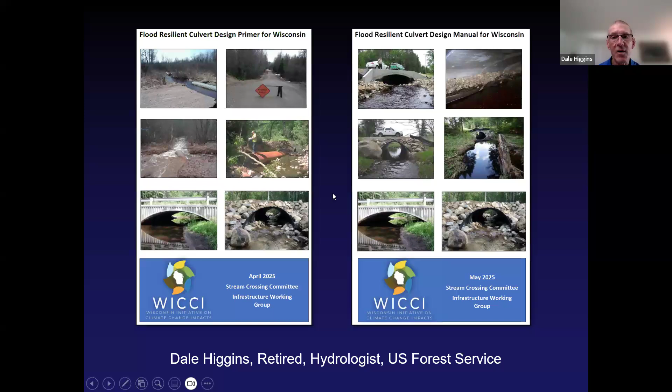In the webinar today, we hope to give you a quick overview of the differences between the primer and the manual, briefly go over traditional culvert design versus flood resilient culvert design and its benefits, and spend the bulk of the time on these six design steps. One thing I'd like to point out is that this comparison of traditional and flood resilient culvert design is only contained in the primer.

Pardon me? I muted them. Keep going. Okay, alright.

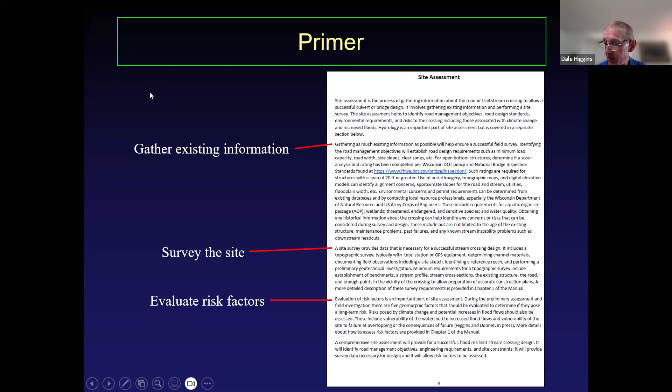Thanks. So as you might expect, the primer is a very concise document, and it essentially tells you what is required and why it might be required, but it doesn't go into the details of how to collect the data or perform the analyses. The manual, on the other hand, has sections several pages long, and it goes into much more detail, not only on what's required, but how to collect the appropriate data or perform the required analyses.

Next, I'd like to talk a little bit about traditional culvert design, which is based on a method we refer to as hydrology and hydraulics, or H&H. It's simply determining the peak discharge and performing a hydraulic analysis, and selecting a culvert size that'll pass the design discharge at an allowable headwater to depth ratio.

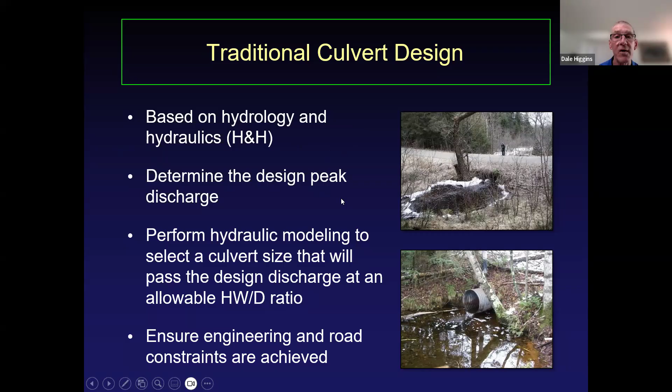So what's headwater to depth ratio? Hopefully this diagram will help set the stage.

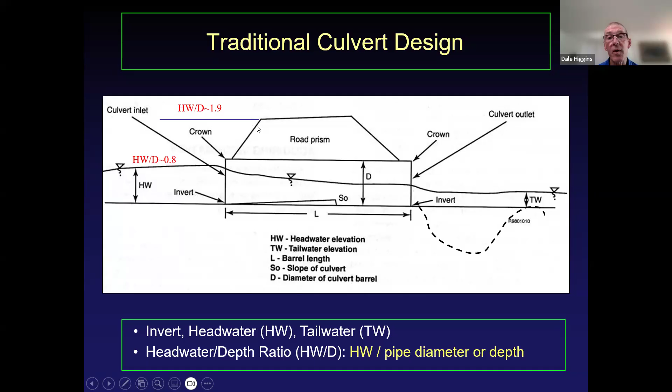Here's the culvert, road prism above it, the water surface, water flowing from left to right, comes down through here. So the headwater is the depth of water acting on the culvert at the inlet, and the depth is really just the height of the culvert or structure at the inlet. In this case, the headwater depth ratio would be about 0.8. If the water were up where it would overtop the road, it'd be a headwater depth ratio of about 1.9.

The first step in the traditional H&H is to estimate the design discharge, you need to select a flood frequency. So I need to cover a couple definitions right away.

The annual exceedance probability, or AEP, is the chance a flood will be exceeded in any given year. It's usually expressed as a percentage, but it can be as a fraction. The recurrence interval, or RI, is the average number of years between an event being exceeded, calculated simply by taking the inverse of the AEP fraction.

So the traditional H&H tends to both minimize culvert size and installation costs. And what that can do is adversely affect both the infrastructure and the ecology, because it doesn't take into account the geomorphic characteristics or processes of the stream.

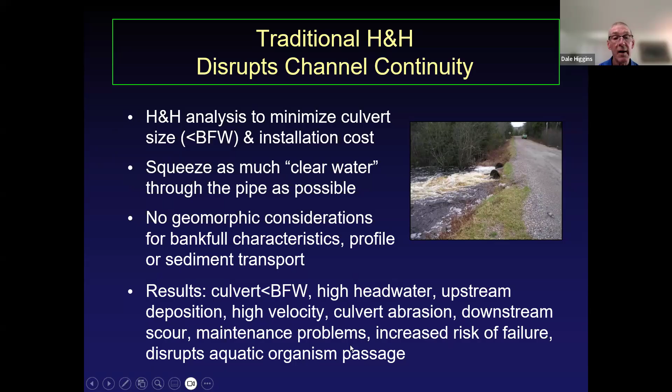So then what happens is this results in culverts less than bank full width, high headwater where you get deposition of sediments upstream, high velocity abrasion in the culvert, downstream scour, maintenance problems, increased disruption of aquatic organisms, and these all lead to increased risk of failure.

So in the primer, we have 7 key requirements of flood resilient culvert design listed. Throughout the webinar, when you see these, we'll have them highlighted in the same color to help them stand out. I only want to mention a few right now.

The first one is that structure width be greater than or equal to bank full width. The other one is maintaining a minimum hydraulic capacity with the headwater depth ratio less than 0.8 at the 1% annual exceedance probability.

When it comes to flood resilient culvert design, we've got methods broken out by moderate to high gradient streams and very low gradient streams. The general concept of this flood resilient culvert design is to design a stream through the crossing and wrap a structure around it. So many of you are probably aware of this classic stream simulation design, and the stream through the crossing is designed based on a nearby reference reach.

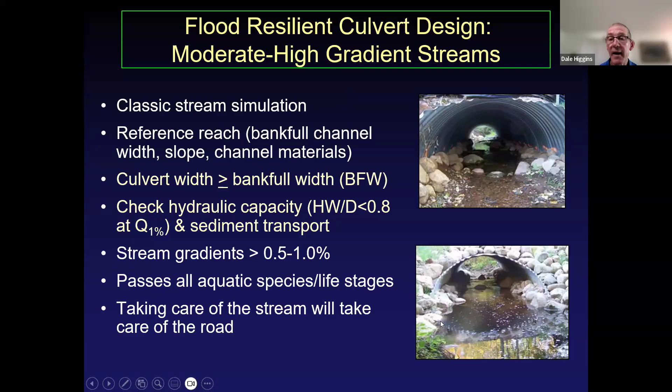In our case, we're saying it generally applies to stream gradients greater than about 0.5%. And one key is that you'll always construct a stream bed and banks through the structure like you see here.

For very low gradient streams, we're talking about streams that only transport sand or finer materials, with slopes less than about 0.5%. We have some modifications for Wisconsin: you set a bank full width culvert at the appropriate elevation, and the sides of the culvert act as the banks.

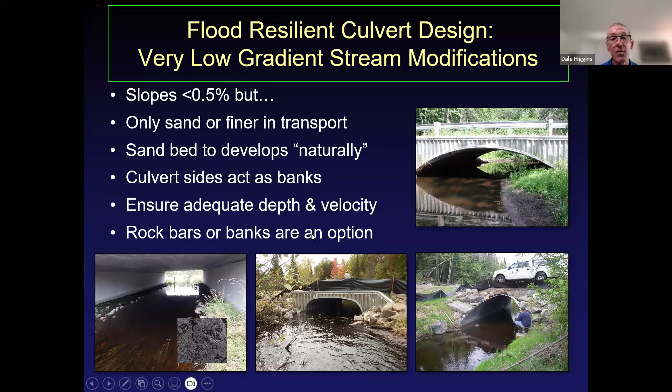A natural sand bed will develop within the culverts. You don't necessarily have to build a bed through, but you can construct rock bars or banks if the depth would be too shallow or the velocity would be too high.

I'd also like to point out that the road would not overtop until the flow reaches almost 5 times the 1% AEP flood. So greater flood capacity and freeboard.

For consideration of passing wood, a study in Northwest California several years ago found that most wood in transport was less than bank full width, and in that case, 99% was. But also that wood longer than bank full width tended to move parallel to flow.

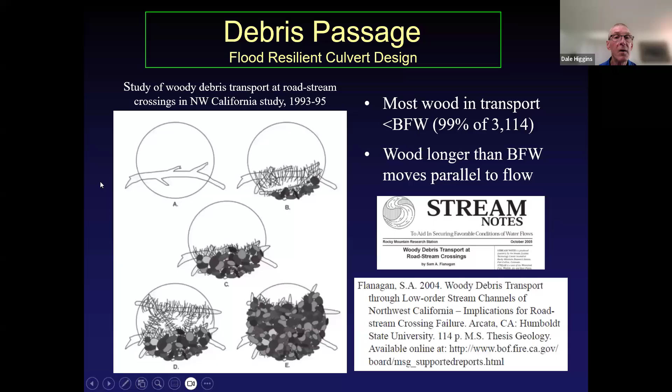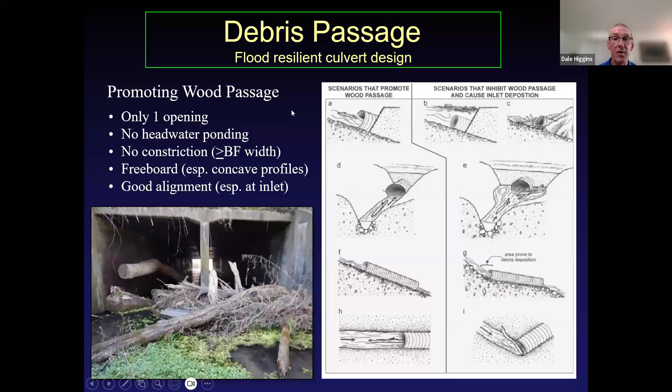Another consideration is abrasion. Exposed inverts are subject to abrasion, which dramatically reduces the lifespan of the culvert, and failures typically occur during high flows. With flood resilient culvert design, you have a bed in the structure which protects the invert from abrasion and dramatically increases the lifespan of the culvert.

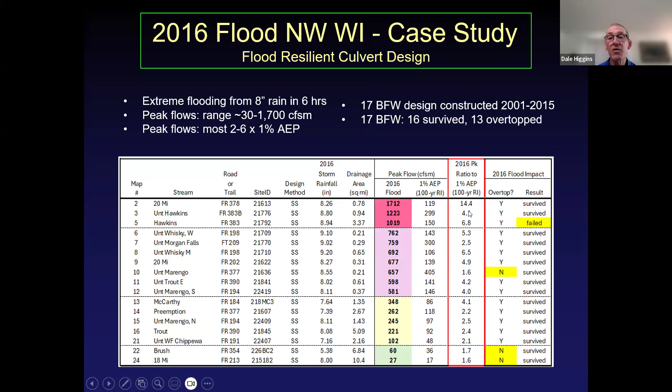The last thing I want to do in this part of the presentation is provide a brief review of a case study of the 2016 flood in Northwest Wisconsin. In that case, 8 inches of rain fell in 6 hours, causing catastrophic flooding and causing most stream crossings in the area to fail. During flood recovery efforts, the Forest Service was able to make a large number of peak flood flow estimates to characterize the extreme nature of the flood. It also happens that they had installed 17 bank full width culverts in the flood area from 2001 to 2015, prior to the flood. 16 of those 17 structures survived, even though 13 overtopped, and they survived flows anywhere from 2 to almost 7 times the 1% AEP flood.

A couple more examples here. Not only were these bank full width culverts, but the roads had broad overflow areas, and substantial parts of the flood did go over the road. They lost some minor to more significant amounts of gravel off the road surface, but the road structure survived, requiring only minor or moderate maintenance. These crossings survived flows that were 2.5 to over 4 times the 1% flood.

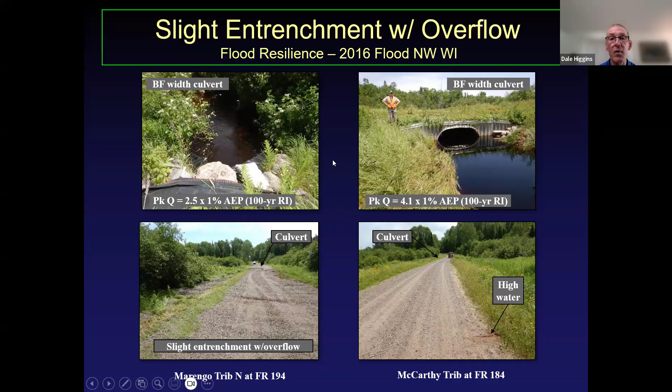We're hoping this case study will be published within the next several days. It promotes using flood resilient culvert design as a baseline at all crossings, then considering the vulnerability of the watershed to increased flood flows in the future, also considering the vulnerability of the site to failure at overtopping, and adding additional design elements as vulnerability increases. With that, I will stop. Thanks.

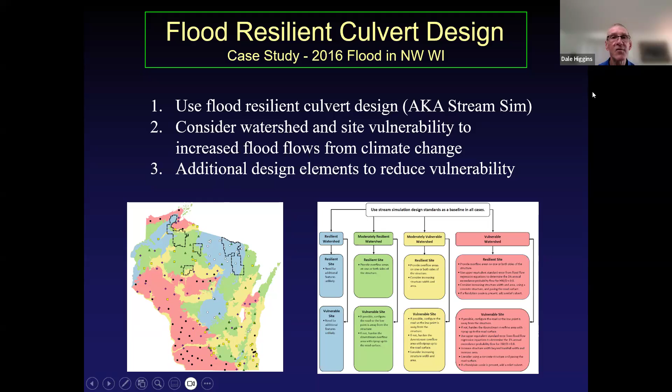Okay, so what we're going to do next is walk through each of the 6 chapters and the 2 appendices of the Flood Resilient Culvert Design Manual.

Let me start with chapter 1, which is all about site assessment. Site assessment is really about what essential field data needs to be collected to inform a flood resilient culvert design. We're going to start with one of the most important things to identify in the field, and that is characterizing the bank full channel.

As you'll learn today, bank full width is really the most important sizing criteria when it comes to determining structure span. So what is bank full width? Bank full width is the water surface width measured at the bank full stage. What's bank full stage? It's the elevation of the water surface at the bank full discharge, also known as the incipient point of flooding - the point where water is about to spill out of its channel and into its floodplain. The bank full discharge is a frequently occurring peak flow that occurs roughly every 1 to 2 years, depending on where you're at.

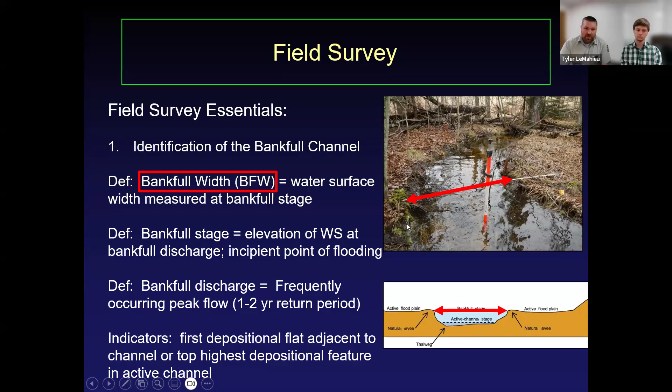Most of our channels, unless they've been severely impacted, actively feature indicators consistent with this bank full stage and bank full width. What you want to look for in the field is the first depositional flat adjacent to the channel, and its elevation should also correspond, if present, to the top of the highest depositional features in the active channel - things like the tops of point bars.

Moving on to the topographic survey side of field assessment, we need a longitudinal profile survey. This is a string of stream thalweg shots to the deepest point of the channel and corresponding water surface shots, taken at every major break in slope of both the water and the thalweg.

These need to extend ideally 20 to 30 channel widths upstream and downstream. So if we have a 10-foot bankful width channel, we need to go 200 to 300 feet upstream and 200 to 300 feet downstream.

Of course, we need cross sections. At least 4 are needed for hydraulic modeling, 2 upstream and 2 downstream. We need these cross sections to extend through the entire valley, ideally the entire floodplain, and to run perpendicular to flow, both in the floodplain and in the channel, even if that requires turning them, as you see with that non-linear cross section, which is a common practice.

Also, if there's a deep plunge pool below the culvert with a tailwater control below that pool, we need a cross section right through the high point of that tailwater control.

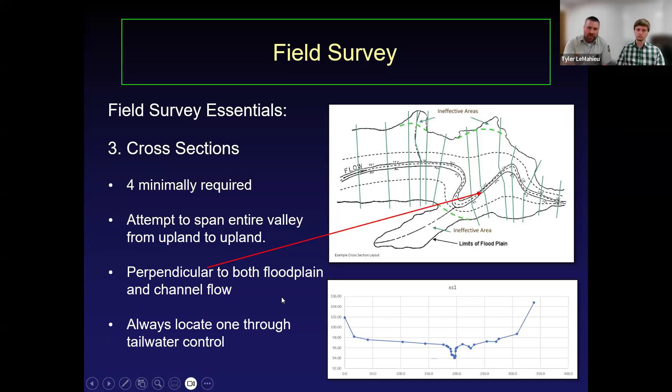Of course, we need to make sure our survey includes all the necessary topographic shots to characterize the road through the entire floodplain and encompassing any extensive road work. We need key shots of structures like low chords of bridges and inverts, bridge decks.

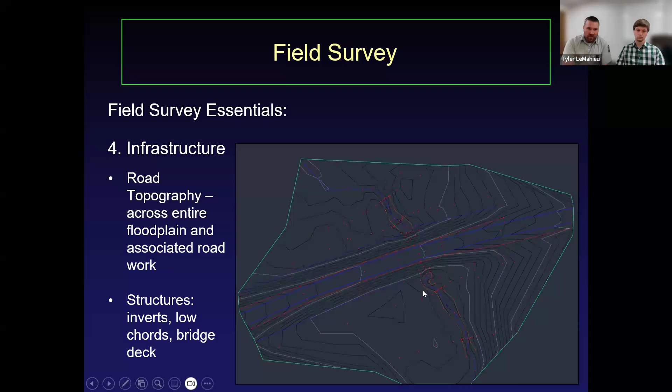Unique to our method, we collect a reference reach. So what is a reference reach? It's simply a reach of the stream that's outside of the influence of the existing culvert and close to the same slope as the design reach.

Within our reference reach, we collect additional cross sections, additional bankful width measurements, detailed sketches of the plan forms and complexity, as well as a pebble count, which we'll talk about more later. The reason we do this is that the reference reach is used in our method as the template for copying the stream characteristics within the culvert.

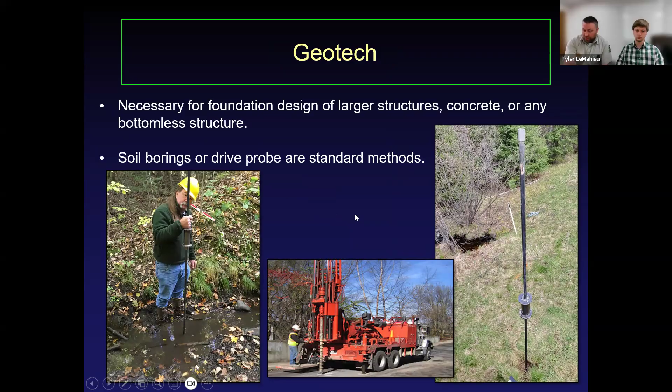Now, a quick aside: geotechnical information gained from either soil borings or drive probing becomes really important with larger structures, or really any size bottomless structure, for forming the foundation design.

We also need to assess risk factors. These can be geomorphic risks, things like head cuts, channel instability, lateral adjustment potential, vertical offsets, mostly identified in the field. We also need to identify climate change induced or flooding risks, which are really two parts. We need to understand, in the office, the characteristics of the watershed that would make it vulnerable or resilient to flood flows increasing at the site.

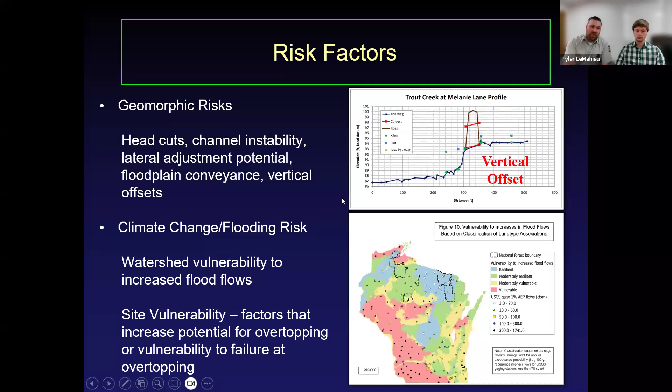That's the watershed scale. At the site scale, we need to look for factors such as lack of a floodplain, steep stream channels, or poor alignment that would cause it to be a riskier site.

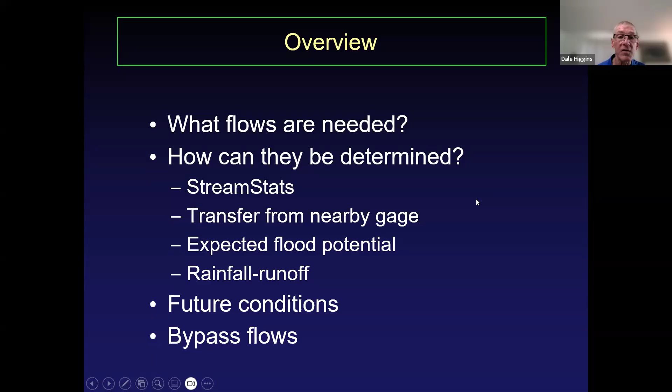We have 4 methods for determining flood flows, but I'll focus primarily on the first one, StreamStats. So what flows are needed? Well, at an absolute minimum, I've already mentioned the 1% AEP, or the 100-year recurrence interval flood, is needed, so you can check that headwater to depth ratio and make sure it's less than 0.8.

If you have a moderate to high gradient site and you're going to need to do a sediment mobility stability analysis, you need a wide range of peak flows for that. We also encourage you to determine that 1.5-year recurrence interval flood, which associates with bankful, and that can help you with your analysis.

So I'll start with that first flood flow method, which we list as StreamStats and the Wisconsin regression equations. I personally consider them, in most cases, to be the most accurate method, and most commonly used too in Wisconsin. Accurate because they're based on observed flood flows at gauging stations. The regression equations use watershed and climatic variables to estimate flood flows, and you have separate equations for different regions of the state. They're also easy to use, because the U.S. Geological Survey has developed an online tool called StreamStats, which will delineate the watershed for you, determine the basin characteristics, and solve the equations.

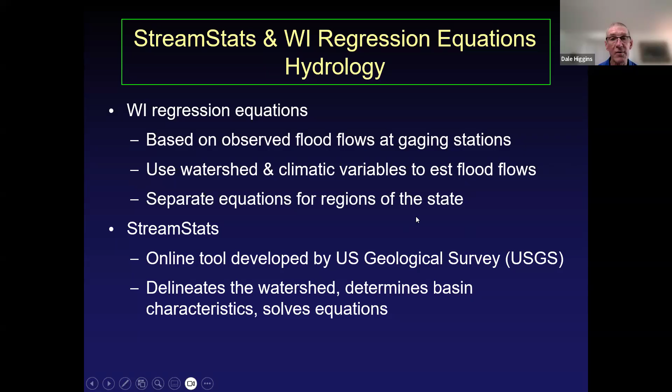This document on the left describes the most recent version of the regression equations, the flood flow regression equations for Wisconsin, which were developed in 2022.

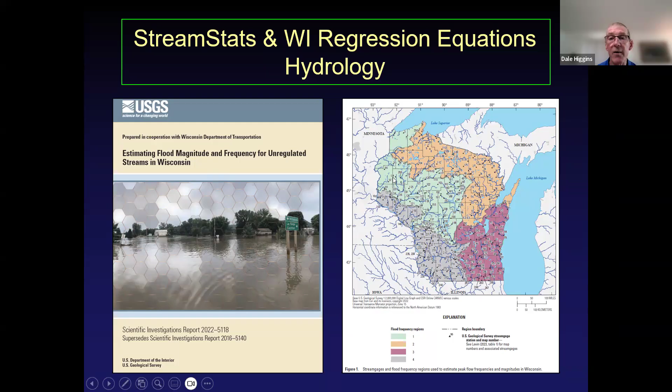The map on the right shows the 4 current flood frequency regions in the state, and the little dots scattered around are the locations of all the stream gauges that were used to develop the equations.

The upper area shows the input parameters that were determined by StreamStats to run the regression equations. The lower part shows the results, with the flood flow estimates for those 8 different AEP floods. It also includes upper and lower prediction limits for the flood flow estimates and standard error of estimate in percent.

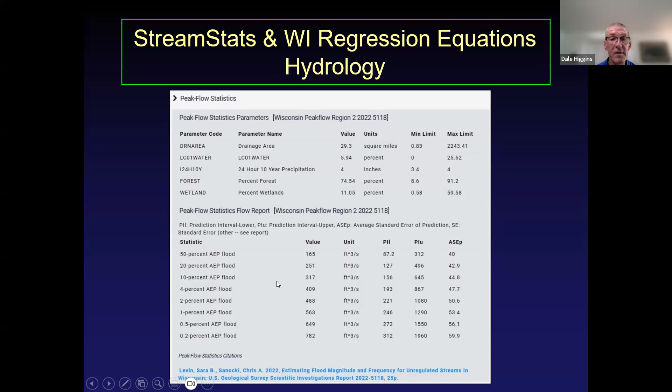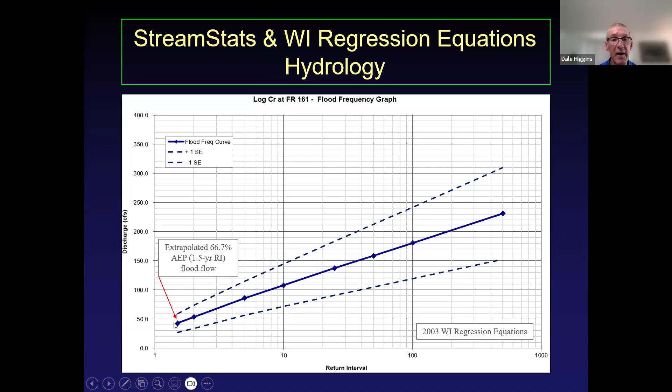One flood flow the regression equations do not provide is the 1.5-year flood, which is associated with bank full flows. An easy way to get that, though, is to just plot the points and extend the line down to obtain that value.

The next method in the chapter goes over transferring flood flows from a nearby gauge for your AEP of interest. We suggest you consider that either as a second method, or if you have some concerns about the accuracy of the regression equations.

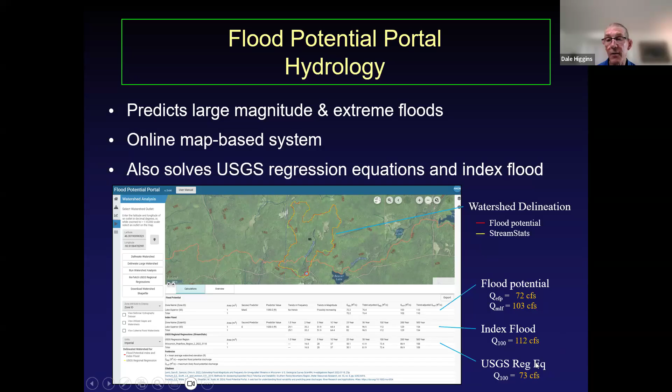The third method is what I call a rather novel approach, called the Flood Potential Portal, which predicts large magnitude and extreme floods. It's an online map-based system that provides estimates of an expected flood potential and a maximum likely flood potential for ungauged sites, and it will also solve the USGS regression equation, so it's handy from that standpoint.

The last item in the chapter, which gets the least attention, is rainfall runoff models, but it does touch on them briefly and go over the advantages and disadvantages of that method.

A couple other items in the chapter: there's a short section on future conditions hydrology. All I'll say today is that it points out that not only will future floods be affected by climate change, but also by watershed characteristics, and how do you take that into account for these long-lasting structures.

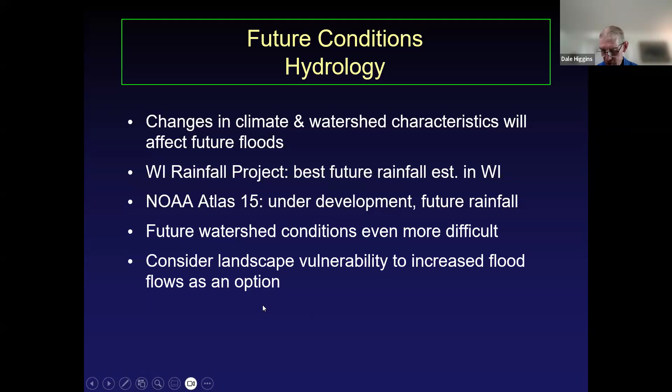And then finally, the chapter has some suggestions for how to estimate bypass flows, if you choose to do so.

So with that, I'll pass it on to Tyler, I believe, or Chris. Chris. Yep, me again.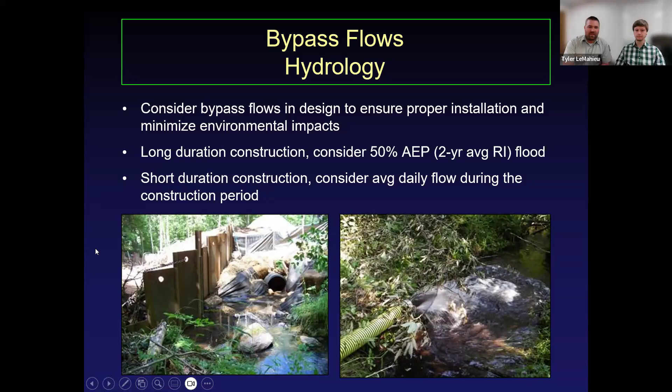Chapter 3 of the manual covers alignment and profile. These are lumped together because they're often done concurrently and iteratively, but they are separate steps, and typically alignment is looked at first. When it comes to alignment, there's really one key core principle.

We must align the inlet of the structure with the upstream channel. This is really essential for passing flood debris.

We can lengthen the culvert and skew it to better align the inlet with the channel upstream. Downstream alignment doesn't matter as much.

A second option for achieving good alignment is we can actually keep the culvert in its existing location, but realign the channel. A couple caveats with this: we must make sure we're not over-steepening our channel if we're not accounting for it by shortening the length. This also includes some excavation in wetlands and stream channels, so we must make sure that DNR is on board with our proposal.

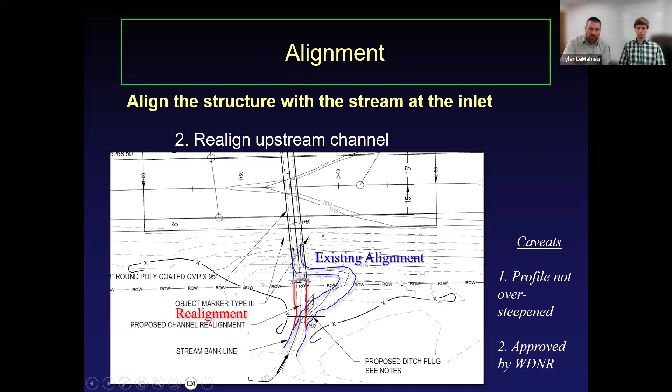A third option is we could actually move the culvert and then dig a new channel downstream. This is something we've liked to do recently. We're able to go with a shorter, less skewed culvert simply because we're putting the culvert right where the stream first hits the road, and then digging a new downstream channel, again pending approval from DNR for that dredging.

So once we've determined our alignment, we then move on to our profile.

This is our longitudinal profile data that's been plotted. A profile analysis seeks to provide a design profile that maintains the natural elevation and slope of the stream by setting a bankful width culvert at the right slope and elevation, embedding that culvert at least a foot into the stream bed based on the design profile.

So the first step after our longitudinal profile is plotted is to determine the existing profile slope. For linear profiles like both of these, that can often be done simply by looking at the trend line of the thalweg and the water surface data.

In the case of the above profile, that's low gradient, you can see we have a slope of 0.12%, which clearly falls within our low gradient method. In the case of the lower profile, at 1.2%, that needs to fall within our moderate to high gradient method. This is the key first step that determines which of the two design methods we're going to follow for the rest of the design.

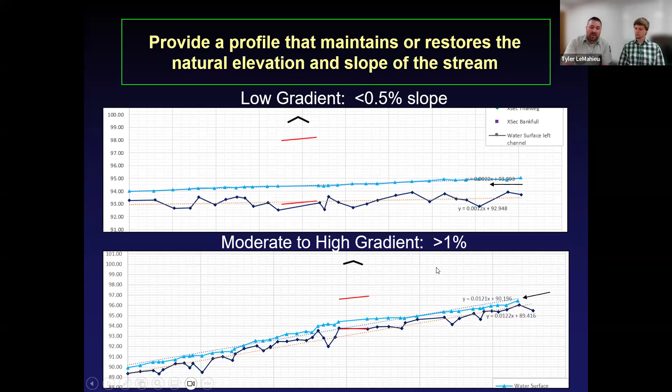If we have a linear, non-impacted, low gradient stream profile, such as this one right here, our analysis to determine our invert elevation is pretty simple. It's 4 basic steps. So we're going to connect our high points of our profile, or our grade controls.

And we're going to look at how deep the pools are scouring. Typically the design profile is where we expect the average thalweg elevation to set up through our crossing, so somewhere right in between.

Our method dictates that we need to embed that bankful width culvert at least 1 foot below the design profile, and that's going to allow 1 to 2 feet of embedment of natural material to be deposited and maintained within the structure.

A couple things: typically with low gradient designs, we are setting culverts flat, but you don't have to if there's a slight slope or it's a longer culvert. We're also typically using full invert structures because it simply helps with the scour protection issue. We rarely use bottomless structures with our low gradient design.

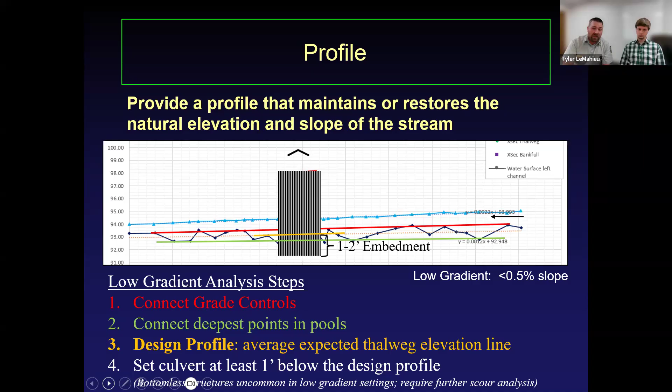One foot of embedment would be a bare minimum and typically applicable to small streams, but we're very frequently going to 2 feet or more of embedment on larger streams or deep streams that scour deeper pools. Additional scour analysis on any sort of bottomless structure might tend to put the bottom of your footings or invert even lower than this. But we're saying 1 foot of embedment would be the bare minimum.

Low gradient profiles are sometimes not linear because they're very susceptible to impacts. Those impacts are typically obvious by upstream ponding, a raising of the water surface elevation upstream, and upstream aggradation, excess deposition of sediments upstream. The designer needs to be aware of the causes and effects of impacts to profiles when doing this analysis. I'm going to give you the 2 most common impacts.

One, and by far the most common, is a set high existing culvert. This red line is the invert of the existing culvert, which is easily 2 feet above the downstream channel, and you can see it's evidenced by ponding and aggradation.

In these cases, we must make sure we base our design profile only on the downstream channel and extend that up through upstream at the same slope, expecting that the upstream channel will eventually downcut and restore itself to its original elevation, setting our culvert at least 1 foot below that design profile.

Another very common impactor to profiles in low gradient streams is to have a slug of sediment sitting downstream from a history of past washouts. These need to be accounted for by determining our design profile based on our furthest downstream reach. Sometimes you can get lucky and it can connect further upstream as well, which will be way below the elevation of that slug of sediment.

We need to make sure we're not only putting a culvert at least a foot below that design profile, but we're also in our plans excavating down to our design profile and removing that excessive deposit of material for a couple of reasons. Number one, it's going to restore the stream ecology and temperature upstream, and will be a great restoration of the stream.

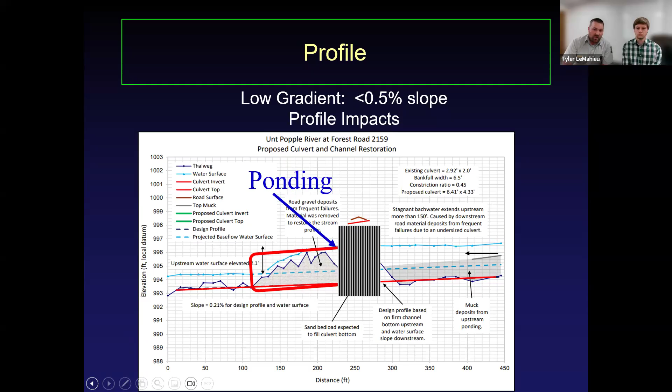Without doing that, that slug of sediment will act as a dam, continuing to elevate the stage of flood flows through our crossings. That's a key element of achieving flood resilience. So that's some key things with low gradient profiles.

Moving on to high gradient profiles now, following our moderate to high gradient method. There's much more involved with this because we're using this to determine part of the design of our channel through a structure. The manual presents 12 steps for analyzing the longitudinal profile and 8 steps for developing the design profile in moderate to high gradient sites. So a couple of key differences.

Rather than a single slope line, like I showed you with the low gradient sites, there's going to be many slope segments that are delineated. And the stability level of grade controls are going to be ranked.

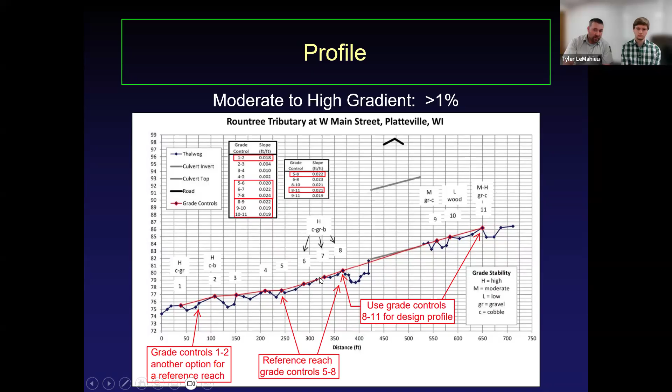Our design profile in high gradient streams is determined by stretching a line between the most stable grade controls directly downstream of the crossing with the most stable grade controls directly upstream of the crossing, and tying into those. We then look for a segment of the stream that most closely matches the slope of this design profile as our reference reach, one that again is outside the influence of the crossing. We're also using this design profile to base the elevation, slope, and sequence of our constructed bed forms, or our riffles and pools within our constructed channel.

When it comes to setting the culvert invert and slope at a moderate to high gradient site, in addition to setting it at grade and below our design profile, we also need to set the bottom of the footer, or the invert, below our lower vertical adjustment potential. There's much more in the manual in chapter 3, but those are the high points, and I'll leave it there and pass it to Tyler.

Hello, it's Tyler now speaking to you, and we're going to start by walking through what's in chapter 4 of the manual: bed and bank design. We'll talk through why we design a bed and banks, and then get into some how-to for these higher gradient sites versus lower gradient sites.

So why are we putting a bed and banks in our pipe? Well, remember, our streams are moving more than just water, right? They're moving wood and debris. Ideally they're moving fish and other organisms, and certainly they're moving bed material. Bed material is kind of the point of question as we think about installing a bed. You can see all those things present essentially in the pictures to the right. Anywhere there's a lack of continuity in some process—water, debris, bed material—that's a failure point or a point of tension. We can make our structures perform better by providing that continuity.

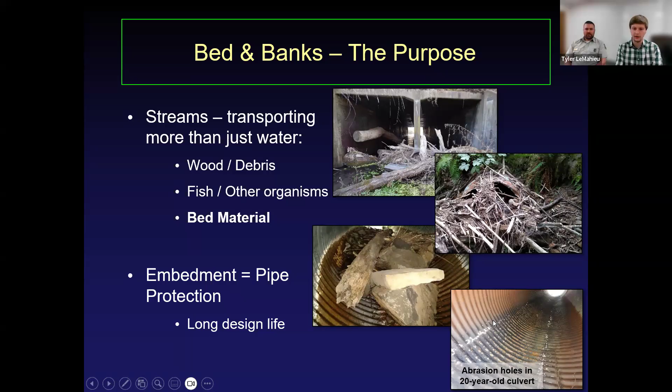Secondly, these are generally going to be upgrades to infrastructure—a little bit bigger pipe, or a lot bigger pipe. And if that infrastructure investment is going to be worth it, it needs to last a long time. Embedment is one way we can help achieve that. If there's a stream bed in a pipe, it's going to protect that pipe against abrasion that might shorten the pipe's life. Here's a couple pictures of whole trees moving through these flood resilient structures. So they really do work.

After we've looked at our reference reach, we should know if our site is on the higher gradient end of the line or the lower gradient side. The road we take for designing bed and banks looks a little different depending on which we're in. For these higher gradient sites, we're going to design a bed that mobilizes at the same flood flows as the natural channel, confined within stable banks.

Why do we need banks? Well, these are higher energy systems with more stream power, and they will happily find that nice, smooth culvert sidewall and dig there to their heart's content if you let them. What's different about low gradient sites is our water's moving slower—it's usually backwatered, there's less stream energy, and it's not going to dig in the same way.

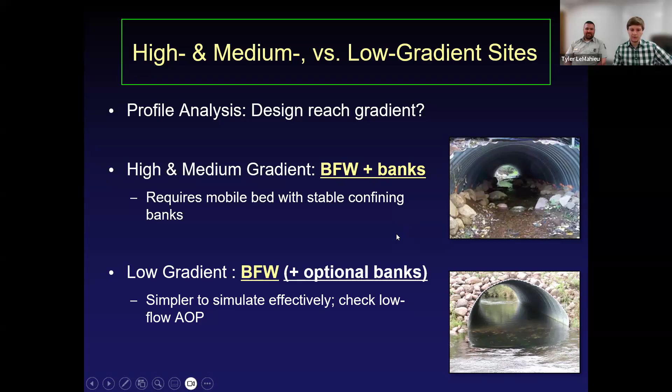So we can generally just get away with a pipe that is bank full width, and there are some other simplifications we'll get to in a minute. But let's start with higher gradient sites. How are we designing our bed and banks?

First, vertically, what are we putting there? Well, we're looking at that reference reach long profile. Whatever that sequence is, if it's a riffle pool sequence, maybe there's some steps, whatever it is, we're going to copy that and paste it essentially through our pipe.

Tying that into grade controls up and downstream. Horizontally, so in cross section, every one of those relevant features, whether it's a riffle or a step, we will have surveyed a cross section in the reference reach. From that cross section, we can create an easily constructible approximation that will be specified within our pipe. Again, high gradient site, so that's going to include both the stream bed and banks.

Here's what that might look like. Right there is our surveyed cross section. We start to play with that and create an approximated version that's a little more easily constructible. Then maybe we start to break that into bed and bank components and play with structures. And then we land at something that is easily constructible, makes sense, and works at our site.

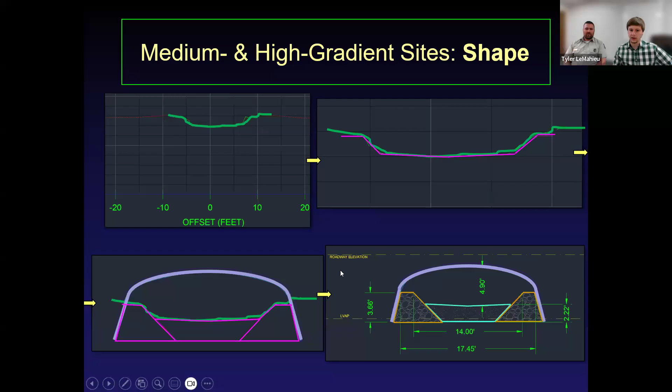Okay, but what are we going to put in our pipe? Let's start with the stream bed. Remember, our goal is that our stream bed mobilizes at the same flood flows as the natural stream bed. And to figure out what gradation we need to accomplish that, we'll do a pebble count.

That's simply walking transects, grabbing random particles and measuring the intermediate axis to get a particle size distribution. It's usually measuring an armored layer, so we might have to supplement some fines so that our flow doesn't go subsurface. Then to specify what we put into the pipe, we take that particle size distribution from the reference reach and break it into components which are easily comprised of readily available material.

So maybe we use some 3/4 inch road gravel, and then we mix it with some 4-inch crushed stone, whatever is available. You'll then specify readily mixable ratios of those various things to create your mix that approximates what you measured.

Still in our stream bed, there might be key pieces. These are large particles, they don't move. They do serve a purpose in maintaining some of that channel form, and generally we're going to specify these separately. So they might be specified individually, like you see on the right there, or they might be specified just by saying use some of your bank mix and put it here, here, and here.

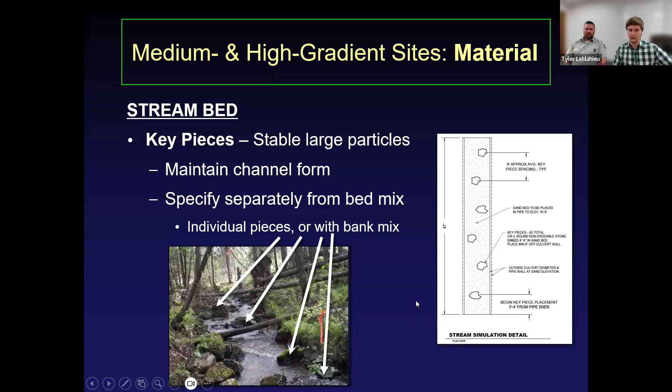Now, how do we get our bank mix? Remember, our goal is stable, immobile banks that confine our bed. Natural banks do this really well. Usually there's some component of roots and wood in them, but it's hard to grow plants within a pipe.

So we use big rocks. To figure out how big our rocks need to be, we're going to do a stability analysis, which will get discussed a little later. Again, key here is to start with that, whatever that large stable particle needs to be. We'll start there and then specify simple, easily available materials to fill out a mix that then fills those voids, because again, we don't want water to go subsurface through voids.

Let's shift over to low gradient sites. Vertically, what are we doing? Well, there's not actually much happening vertically usually through these sites, so we can usually just set a pipe flat. Now, as pipes start getting longer, it can still be better to start sloping a pipe, but often set flat works great.

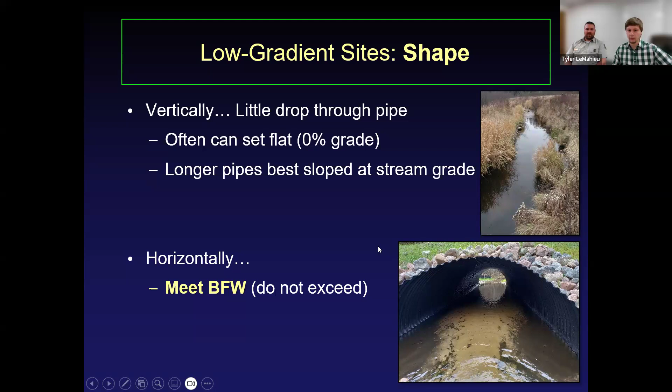Horizontally, we've touched on it already, but usually we're just going to specify a pipe that is at bank full width, no wider. Because it turns out these pipe sidewalls tend to really effectively simulate vertical banks in a lot of these low gradient systems. Picture like a sedge meadow with nice stable vertical banks.

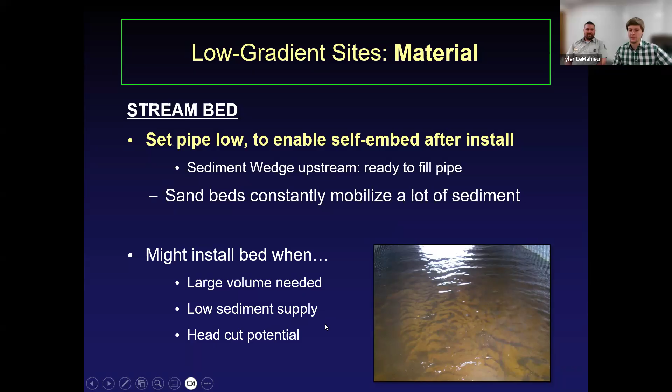What are we doing for a stream bed? Well, usually not much. Often in these systems, there's a lot of material being mobilized pretty consistently, especially in sand beds. And if we set a pipe sufficiently low, there's generally enough material present upstream that it will naturally self-embed after installation. Now, maybe there's a ton of material that you need to fill in that pipe and you're not sure in that system that it's going to be present upstream, or maybe you're worried about a head cut. Those might be scenarios when you do install a stream bed up front.

And what do we do for banks? Well, we already touched on it. In low gradient systems, the culvert sidewall really works as the banks. Certainly you can specify a wider structure and put banks in. You might do that if you're trying to also accommodate terrestrial organisms, but generally there's no need.

In these low gradient systems, it often looks like this. It's a bankful width structure. It's set flat, a foot or 2 feet below the thalweg, and it's allowed to just naturally embed and fill in.

Now, a little caveat - if thinking about aquatic organism passage through the whole range of flows a site might see, during low flow there may be sites where you get too shallow of a channel. So you might consider adding structure like rock bars to simulate the natural channel and maintain a deeper channel for fish during low flow conditions.

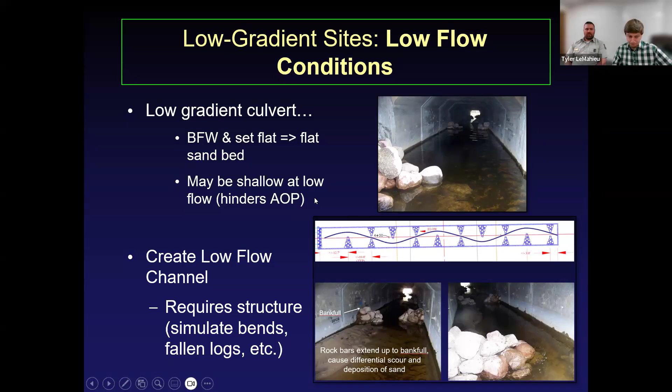All right, let's pivot to chapter 5 of the manual, which contains structure selection and design.

As we run through this, we'll talk about overall, what's our goal, what are we doing. We'll talk about how we size our pipe in the flood resilient method. We'll go over some common structures that might apply, and then we might look at some differences in high and low gradient sites.

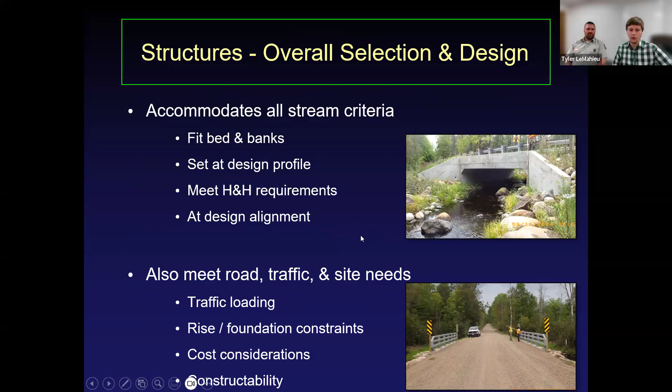Our structure is really where all the different things we are discussing today come together. We've got to accommodate all these other design considerations. And not only that, but we need to meet all the road and traffic considerations - every other bit of site need has to all come together at our structure.

And traditionally, with hydraulic design, we have a design flow, and we're going to size a pipe to cost-efficiently pass that flow. We can kind of get to a right answer, and it feels good to us engineers. The flood resilient method is somewhat different.

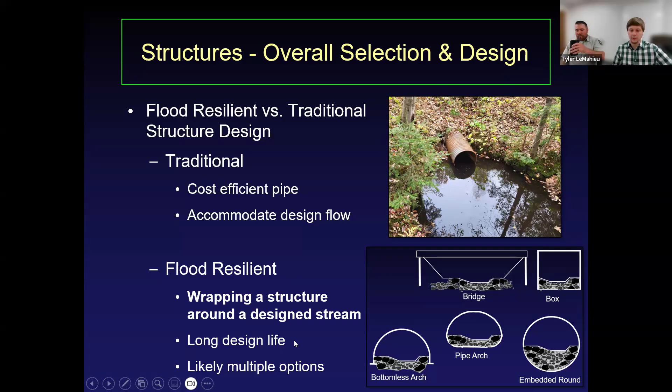One key component to designing flood resilient structures is a long life. Like we mentioned, these are infrastructure upgrades. And if that upgrade is going to be worth it, it needs to be there for a long time.

So how do we size our pipe with the flood resilient method? Well, we start with bankful. If it's a low gradient site, we're just going to start with a pipe that's bankful width. If it's a high gradient site, we're going to fit bed and banks.

Then we're going to look vertically. On the lower side, our goal is to have our pipe consistently embedded through its whole life. So we're going to look at the lower vertical adjustment potential and make sure our invert or our foundations are set below that. So you might run scour analysis, especially for bottomless structures.

And then if we look up, where's our road? Do we have very little fill to work with? Do we have a lot of fill to work with? Can we raise our road? Can we not?

These 3 factors start to really narrow down, one by one, what commercially available structures are available to us. And then we settle on something. Finally, we check the hydraulics, and usually we come out right around our design objective, or it overachieves to some degree. And certainly this process is iterative.

So what might we use? Well, the common ones would be a corrugated metal pipe - a round pipe, probably familiar to many of you. And then we have pipe arches, very similar - it's just a squashed round. We start to get a wider structure for a given rise with the pipe arch.

Once we're dealing with bigger structures that we can't build with a single piece, we'll start looking at various structural plate structures. Aluminum boxes are one of them. They come in a lot of sizes, and they're great for a lot of these Midwest sites that have low fill. They can accommodate a quite wide span for a given rise.

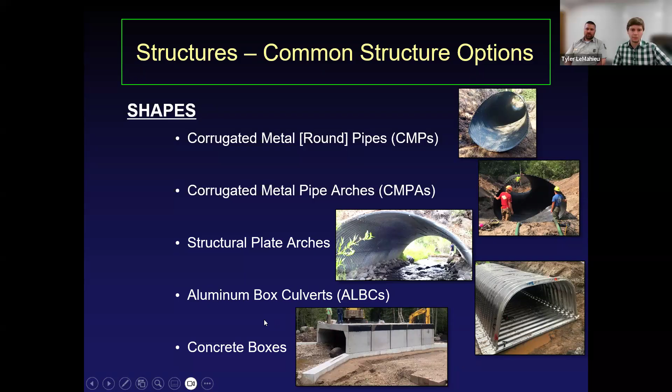Materials, right? We have concrete. Concrete's strong, it's durable, it's long lasting, it's heavy, it resists buoyancy. It's kind of the Cadillac if you can afford it for these applications. It can come at a little greater cost.

But steel is probably what we see most commonly installed. It comes in a number of coatings. Galvanized usually isn't going to be long enough lasting to be the best fit for these applications, where aluminized or poly-coated pipes will serve better. In particular, we use a lot of polymer-coated pipes. We expect 75, 100 or more years out of them.

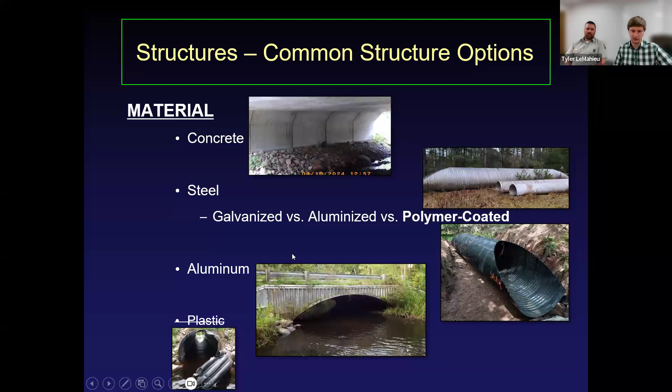Aluminum is another material available. It's lightweight, which is helpful for larger structures, and it is very long-lasting as well. So it serves its purpose well. As a note, plastic pipes, for a number of reasons, don't really work well for these flood resilient crossings, so we'd recommend not using them.

End treatments, a ton more here in the manual. I'll just briefly speak to step bevels. It's a low-cost end treatment that gives you notably improved inlet hydraulics and improves your flood passage, especially when debris starts to accumulate. So it fits a lot of structures well, especially ones with full inverts. But look to the manual for more.

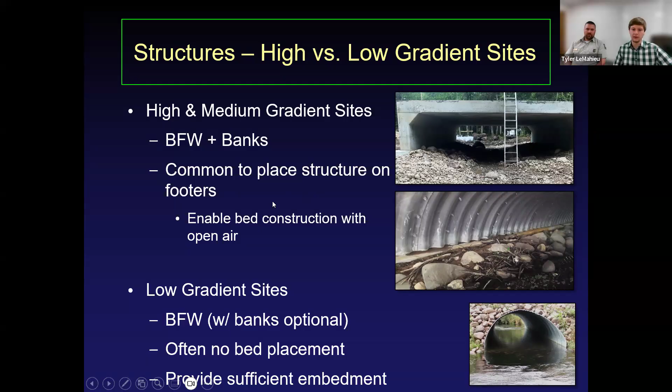Lastly, the site gradient and its impact on our structure selection. Most notably, you're just considering what needs to be built in the pipe. So if you've got a bed and banks to build, you need to make sure you can do that, whether that be with a stem wall that you construct the bed and banks before the top of the pipe, or providing enough headroom. So with that, we'll jump to the next section, but I just want to highlight there's a lot more to this one in the manual. In particular, foundation design can become pretty important as we start to look at bigger structures. So look there for more.

Okay, thanks, Tyler. I'll be covering this next section, which is Chapter 6, Hydraulic Analysis.

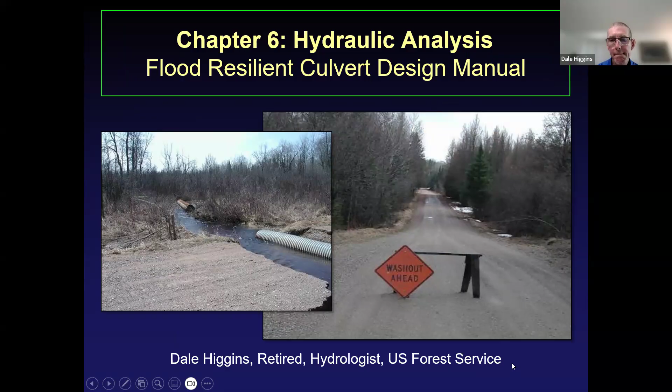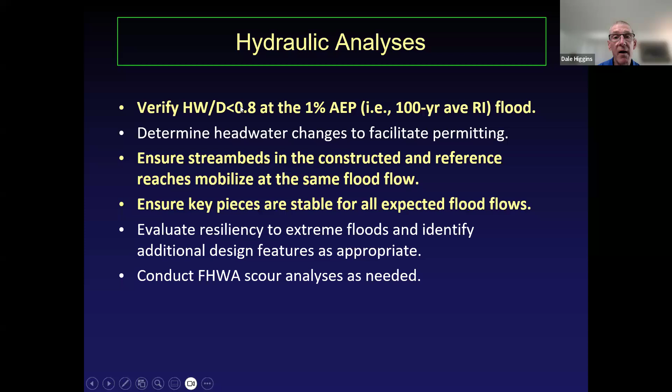In the manual, we have six analyses listed that you can perform. The three here are highlighted, are part of those key requirements we talked about. And I'll touch on each one of these very briefly. But before I get started, just want to cover a few background items.

The examples you'll see here of hydraulic analysis were performed with HEC-RAS, which is publicly available to everyone. It's a very functional program. There's another publicly available program, hydraulic model HY-8, which is easy to use, not quite as robust as HEC-RAS. And then we also have a few tips or suggestions for you if you're doing hydraulic modeling.

One would be always model the existing structure. It'll help you decipher the current condition, history of that structure, and help you with determining model accuracy. Does it match the reported history? We have also mentioned that modeling that 1.5-year flood as it relates to bank full can help verify your flood flows and accuracy of the model.

A couple other items: if you have a moderate to high gradient site, you're going to do sediment mobility, stability analyses. You need to use the lid option to be able to get those hydraulic parameters from inside your structure. And then for very low gradient sites, you can use the depth block option in Culvert editor to mimic the stream bed. So one last item, if you're interested in using HEC-RAS and have limited experience, we've got some of the basics laid out in the manual in Appendix C. So I'll start with that.

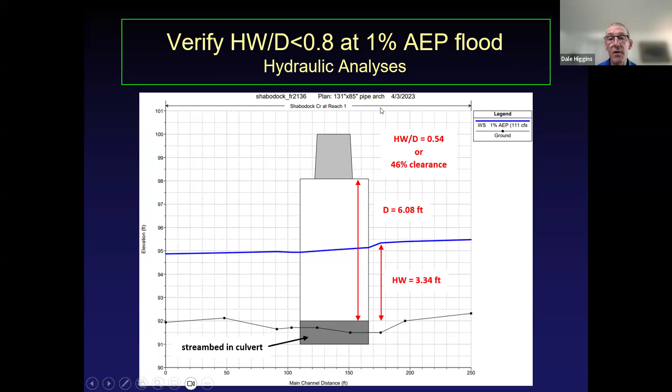First, hydraulic analysis, the most important one: verify that the headwater depth ratio is less than 0.8 at the 1% AEP flood. So here's an example, very low gradient stream, bank full width culvert. And what you see here is the hydraulic modeling. Both the headwater and the depth were determined from the top of the assumed top of the bed in the culvert. And so in this case, we easily met that criteria with a headwater depth ratio of 0.54.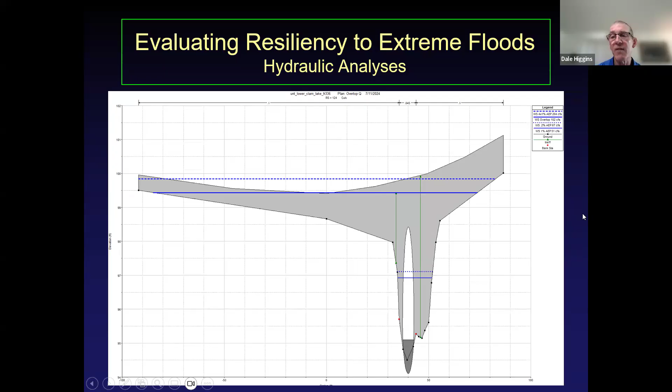At this point, a designer could consider: what's the vulnerability of the watershed? How likely is this to happen? If it happened, would the road survive? Do I need additional features? So you get a sense of the type of analysis you can do very quickly with regard to evaluating extreme floods.

The last item I want to touch on is that in Wisconsin, for structures greater than or equal to 20 feet with an open bottom, you need to conduct a Federal Highway Administration scour analysis. There are some references here on how to do it. It's detailed enough that you probably need a civil engineer to do it, or maybe a hydrologist.

One thing I do want to point out is that it's different from that geomorphic scour analysis and lower vertical adjustment potential - it's a different type of analysis. Again, I'd reiterate, if you're on a low gradient sand bed system, go ahead and use an invert, and that'll protect you from worrying about scour analysis.

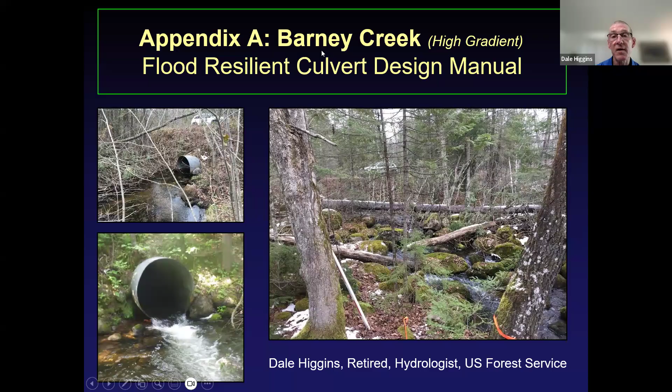Okay, so that ends that portion. The next thing I want to do is very quickly go over an example of a design for a high gradient stream. I just point out that the construction design plans for this particular site are in Appendix A of the manual.

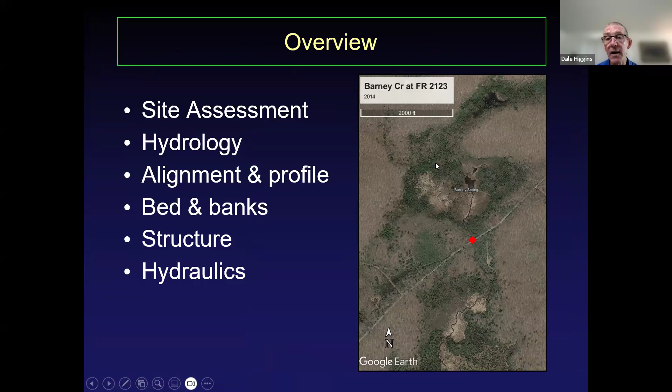What I plan to do is go over these 6 design steps very quickly. First, I'd like to show you the road and the site on this aerial photo. The high gradient stream section is right in here, but there's also a very low gradient segment just above that.

From a site assessment standpoint, fish passage was a major concern, as was structure condition. There also is significant blowdown just upstream of the culvert and the steep channel.

From a survey standpoint, survey of the stream profile here - cross sections, as Chris described, started out with 7, and then once the reference reach was identified, 4 more were added. There was some more detailed survey of the bed and banks in the vicinity of the culvert, and then lots of road points as well.

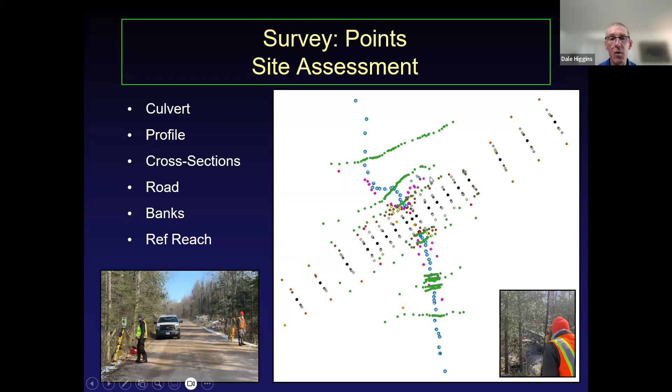Once the reference reach was identified, a pebble count was conducted there. Key pieces are also measured throughout the entire surveyed reach. One thing you'll see - these numbers are in millimeters, but they're large particle sizes. I think it's the largest bed I ever worked on, and you can see that easily in some of the photographs too.

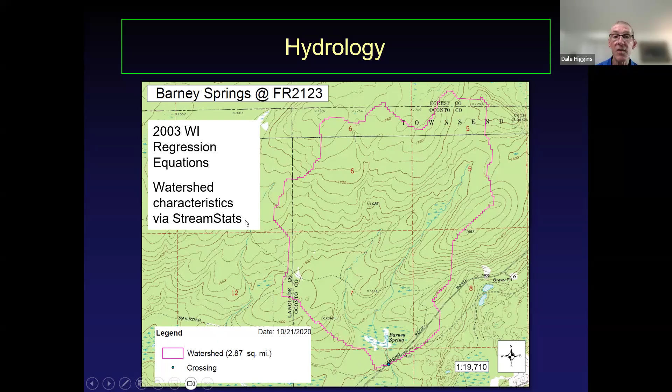From a hydrology standpoint, at the time of the analysis, Stream Stats had just implemented the watershed characteristics portion, so that was used to delineate the watershed and determine those characteristics. But then the 2003 Wisconsin regression equations were solved in a spreadsheet to come up with the flood flows.

Okay, in this particular case, the alignment was good, especially at the inlet, so there's no change needed there.

So the profile is plotted and analyzed to identify that design profile and reference reach and develop that lower vertical adjustment potential, or LVAP. So the profile was broken up into 5 segments, with grade controls at the ends of each one.

Interesting enough, they varied from 1.9% as the gradient was flattening out above the culvert to a short stretch that was 12%. The design profile, which ran from these 2 grade controls, was 2.9%.

And then the reference reach that was identified was 3.0%. Now, the LVAP, which flows through here, is almost 4 feet below the existing culvert. So any invert of a new structure or footer would have to be down below that line.

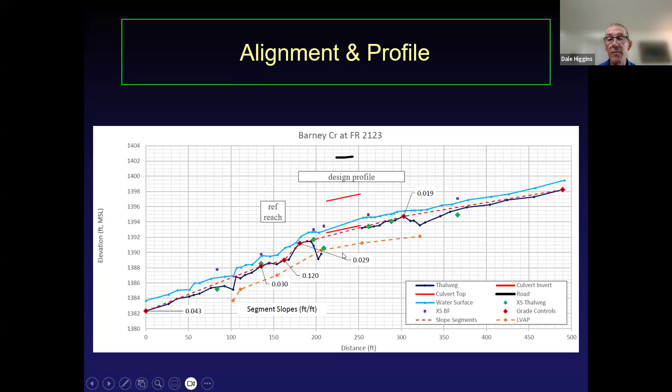So the typical cross-section from the reference reach was used to develop a typical cross-section for the bed construction of the culvert with 2-foot banks added on each side, bed mix determined from a particle size distribution. Those two were mated together, and it was determined that this design bed would fit within a very large pipe arch culvert and be able to fit below that lower vertical adjustment potential.

So this slide here just shows the site sketch from the reference reach and photograph from the reference reach and how they were used to help design the bed through the crossing.

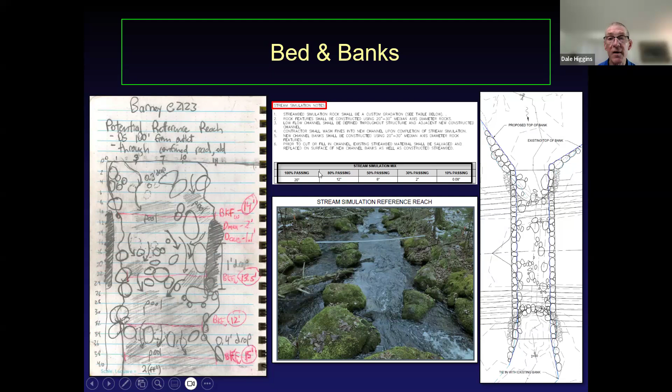And here's a plan view of that in the construction plans and the specification of stream bed mix here. These are also from the construction plans, showing both the culvert and the bed in cross section and profile view.

And then from a hydraulic standpoint, two big steps: verify the headwater to depth ratio. That was met very easily with a headwater to depth ratio of 0.39.

And then in this particular case, normally you want to have the beds mobilize in the structure and reference reach at the same time. But all you have to do is look at this channel, extremely coarse, steep channel.

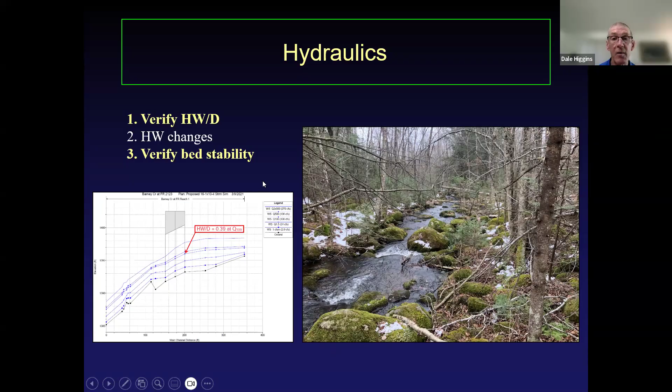And we anticipated it to be extremely stable, especially given that low gradient segment upstream, that was unlikely to deliver any kind of material this size. So we anticipated that the bed would be very stable. And the analysis confirmed that - that's the beauty of the reference reach, I think.

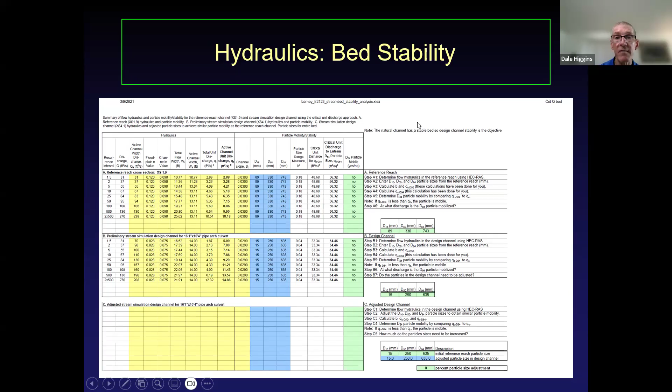So I'll pass it to Chris.

So Appendix B of the manual has the plan set for a very low gradient design. I really don't have time to go much through this. I'll just say really fast, there were no risk factors.

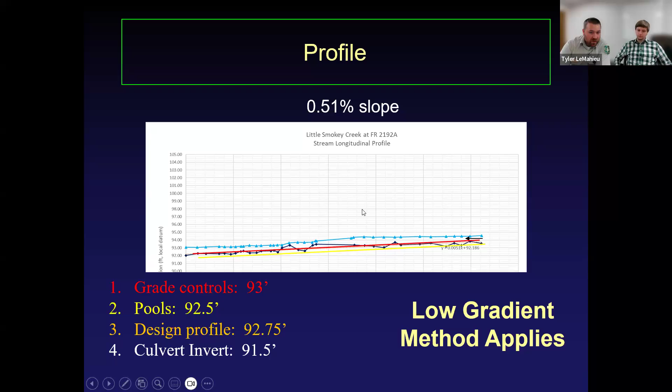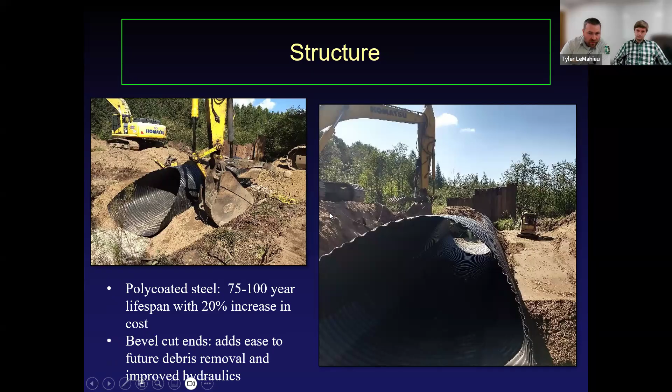The flood flows were low. The alignment was good. Gradient was low. Set the culvert about 1.25 feet below the design profile. Chose a pipe arch that was right at bank full width, embedded there to naturally fill with sand. Used our typical poly-coated steel pipe arch for long life, bevel cut ends. Headwater to depth ratio met our standard.

Worked with Coleman Engineering up in the UP, who did a great job with the plan set, and ultimately came out with a great solution.

So I think the takeaway is flood resilient culvert design does not have to be complicated. And I would say for us, 90% of what we do are low gradient streams in northern Wisconsin.

And this culvert is still working on embedding. This is taken right after construction. It can take up to a couple years for that culvert to embed.

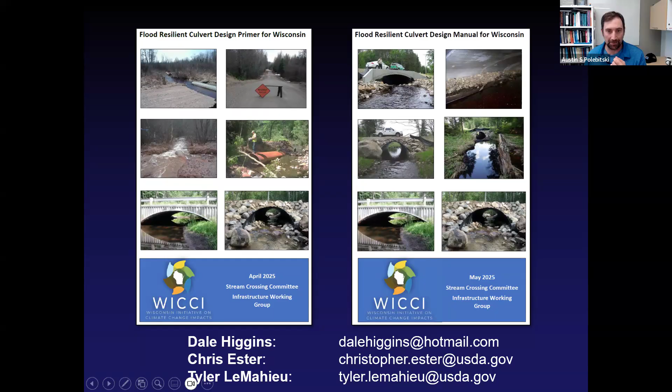Yep, I've got a couple, but I think right before we do that, I'm going to steal your screen share from you, if you don't mind. Stop sharing for just one second. Yeah.

Okay, so I just want to show you all two things, and then we're going to do questions. If you go to the Infrastructure Working Group webpage at WICCI, you can just Google WICCI Infrastructure Working Group to get to where the documents are. All you have to do from that front landing page is click on Initiatives, and here are different initiatives and data, whether it's the Wisconsin Rainfall Project or other surveys. Down at the bottom, we've got the flood resilient road stream crossings, and both the primer and the manual are there—you should be able to click on them and download them as PDFs.

Last thing before we get to questions, at Platteville we have a website, a landing page for the Climate Resiliency Seminar Series. The recording, once we download it, we'll post up here. All future seminar events will also be on this website, and you'll go through the same process to register for those talks in the future. Eventually, if you give me a little bit of time, I will send out a link where you'll be able to request the PDH also through this website.